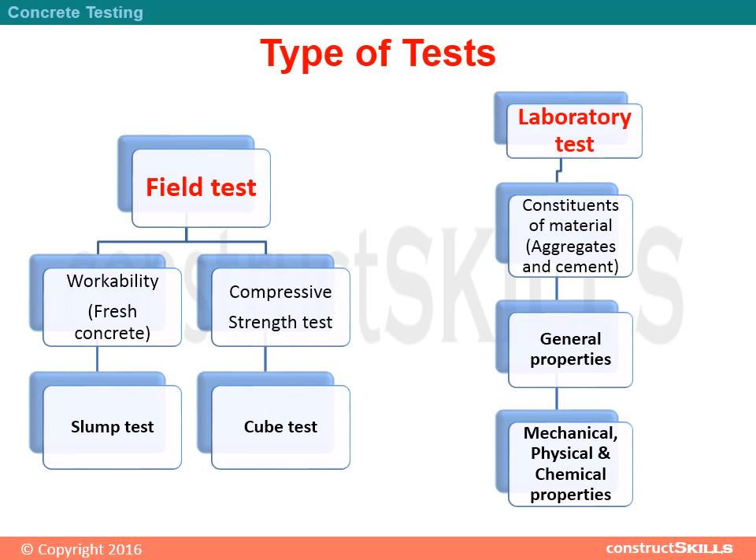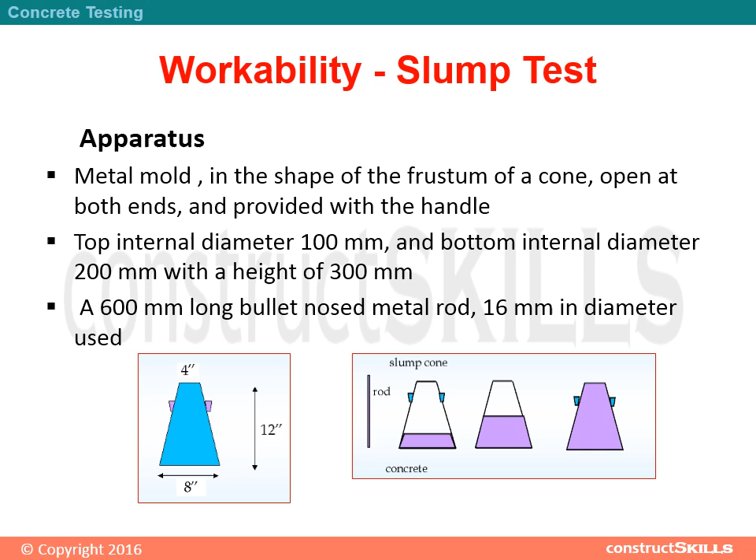Under this test, check the general, mechanical, physical and chemical properties of aggregates. Workability, slump test. Apparatus. Metal mold, in the shape of the frustum of a cone, open at both ends, and provided with a handle. Top internal diameter 100 mm, and bottom internal diameter 200 mm with a height of 300 mm. A 600 mm long bullet-nosed metal rod, 16 mm in diameter, is used.

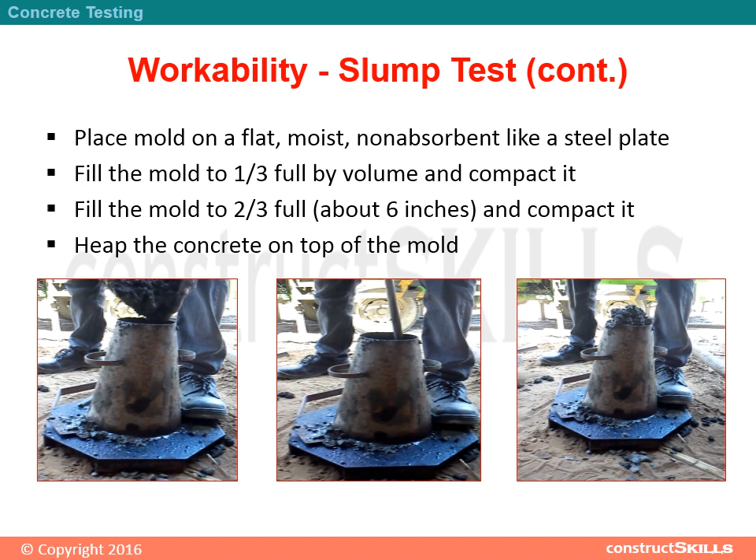Place mold on a flat, moist, non-absorbent surface like a steel plate. Fill the mold to 1/3 full by volume and compact it. Fill the mold to 2/3 full, about 6 inches, and compact it. Heap the concrete on top of the mold. Strike off the top surface of the concrete even to the top of the mold.

Remove the mold carefully, take about 5 seconds. Immediately invert and place the mold beside the slumped concrete and place the rod horizontally across the mold, and measure the slump. The slump test should take approximately 2.5 minutes.

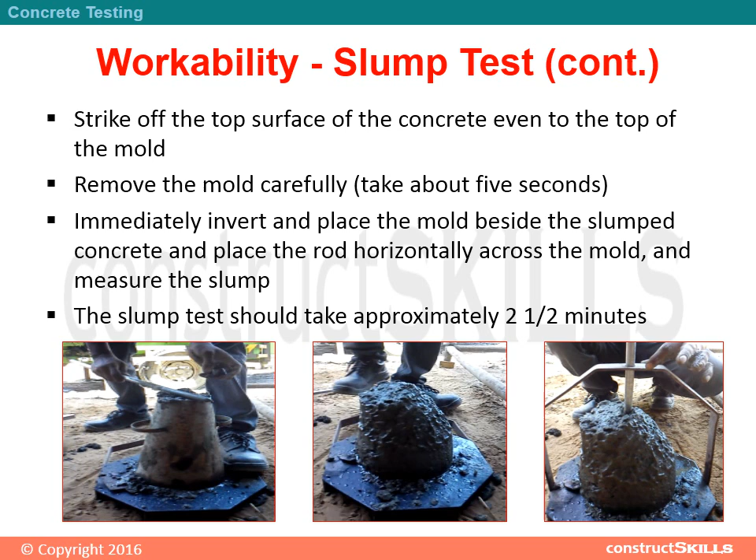Average slump. For blinding concrete, shallow sections, pavements using pavers, use very low workable concrete. In this category of placing conditions where strict control is necessary, workability can be better controlled by controlling compacting factor between 0.75 to 0.8. For mass concrete, lightly reinforced section in slab, beam, walls, columns, canal lining, strip footing, hand-placed pavement, use of concrete having low workability and slump value 25 to 75 mm preferable.

For heavily reinforced sections in slab, beam, walls, column, slip form work, pumped concrete, use of medium degree workability concrete and slump value 50 to 100 mm preferable. For trench filling and in situ concrete, high workability concrete having slump 100 to 150 mm preferable. For tremie, very high workable concrete used.

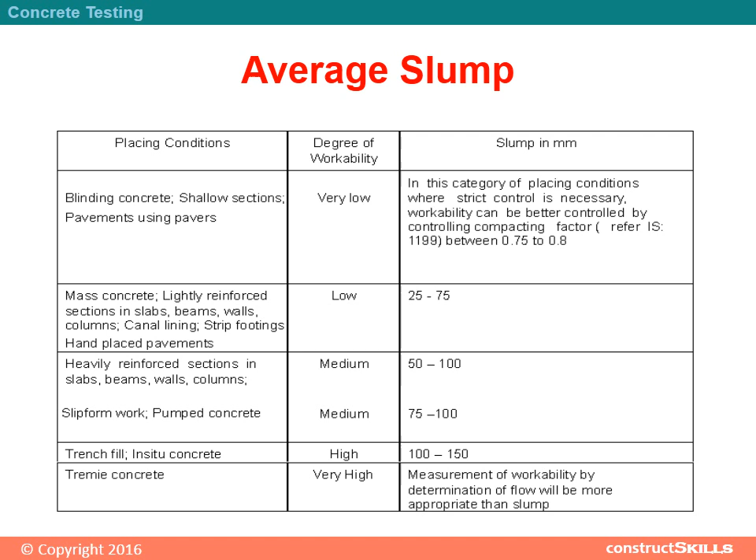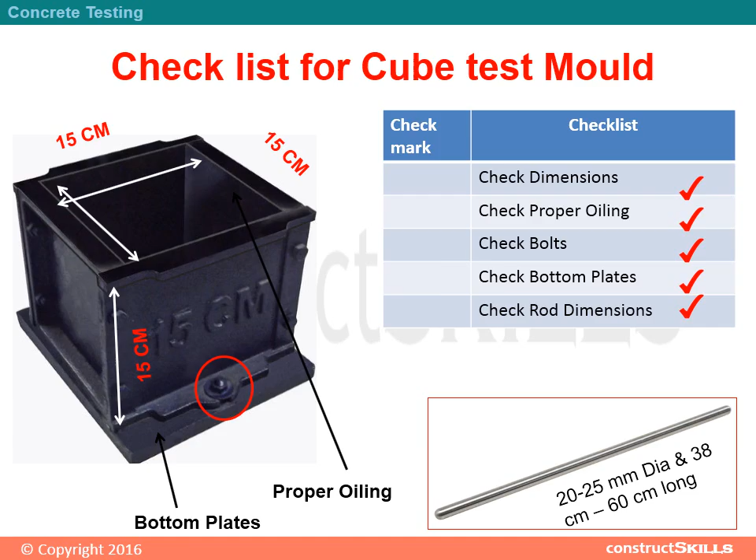Checklist for cube test mold. Check dimension. Check proper oiling. Check bolts. Check bottom plates. Check rod dimensions. Cube register. Example of cube register is given below. Information filled in cube register.

Cube mark. Age of curing. Weight of cube. Dimension of cube. Density of cube. Area of cube. Failure load. Compressive strength. Average compressive strength. Compressive strength calculations for cube: failure load in Newton per area of cube.

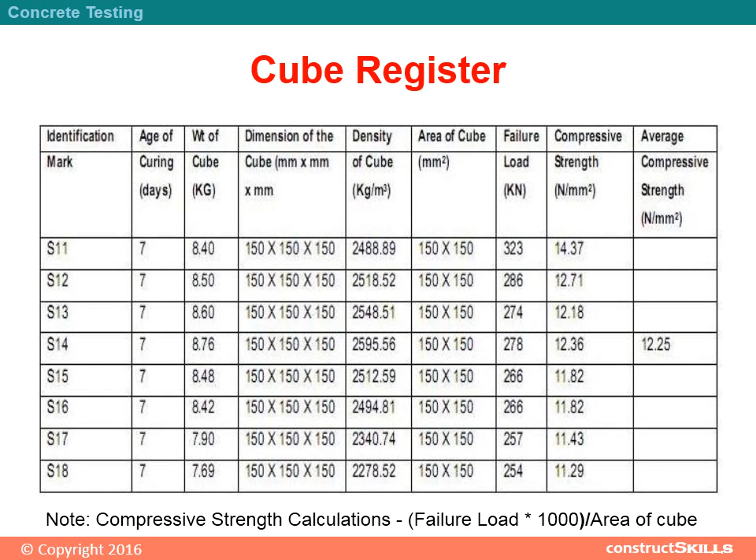Cube test. By this test one judges whether concreting has been done properly or not. Cube molds of size 15 cm by 15 cm by 15 cm. Concrete is poured in the mold and tamped properly so as not to have any voids. After 24 hours these molds are removed and test specimens are put in water for curing.

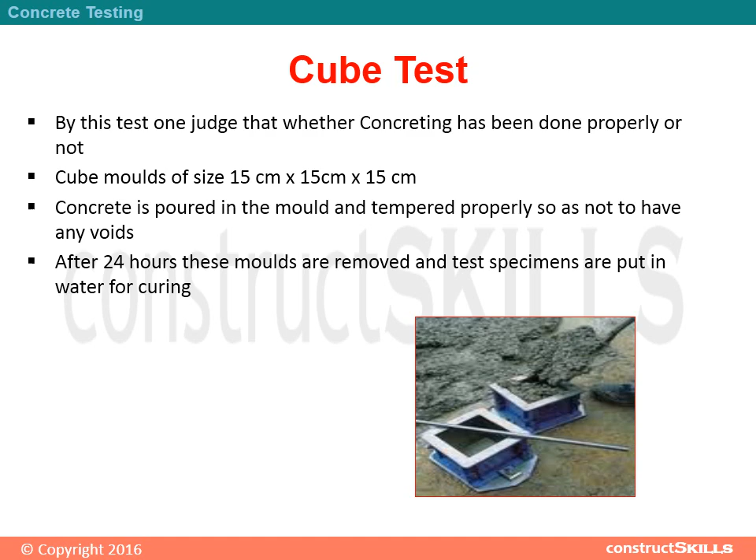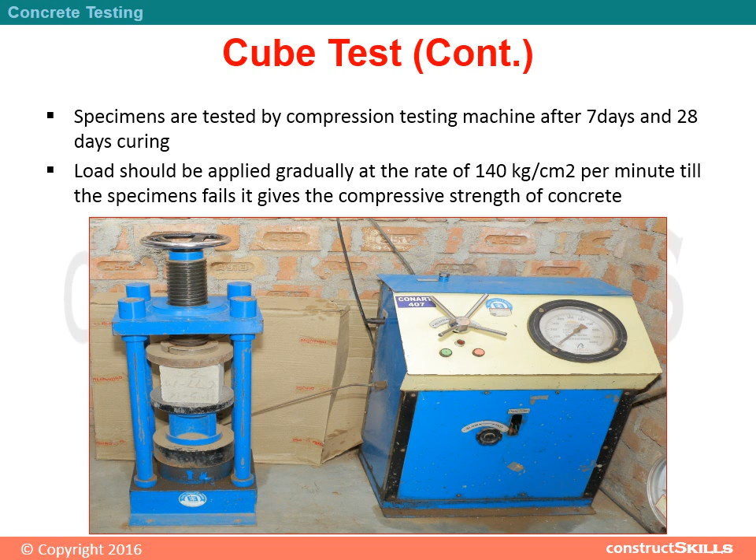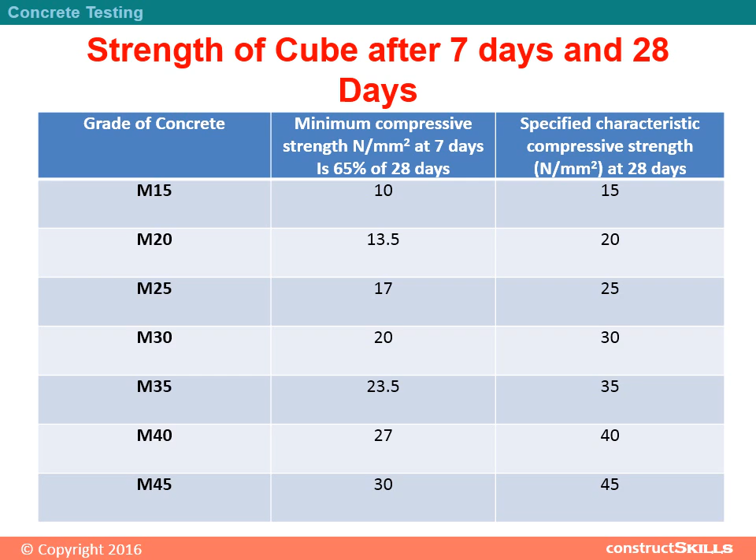Specimens are tested by compression testing machine after 7 days and 28 days curing. Load should be applied gradually at the rate of 140 kg per centimeter square per minute till the specimen fails. It gives the compressive strength of concrete. Strength of cube after 7 days and 28 days. Minimum compressive strength of concrete at 7 days is 65% of 28 days strength. Strength of cube after 7 days and 28 days shown in the table below.